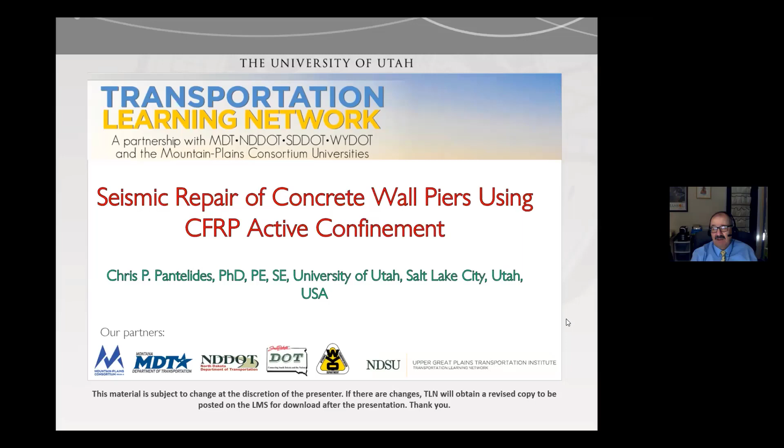Thanks, everybody, for attending. Before I start, I just want to start with this slide because I'm a professor and without my students, I can't do anything. Vanessa McEntee got her MS on this work from Boise, and Bhaskar Kunwar, who's originally from Nepal but now works here in West Jordan, Utah, were the students who did all the work.

So the topic here is seismic repair of concrete wall piers using carbon fiber reinforced polymer confinement. I'm sure all of you know what a concrete wall pier is, but I'll show you a few slides.

As an outline, I'll give a little overview of what a wall pier is, and I'll talk about the tests we did. We have an as-built concrete wall pier, built with standards before any seismic requirements, and a modern code compliant concrete wall pier that meets the current seismic requirements. Then we built a couple more specimens identical to the as-built one, but retrofitted. The first retrofit used vertical carbon fiber anchors, and the second retrofit used carbon fiber near surface mounted bars. So you would think we built four specimens and that would be the end of it.

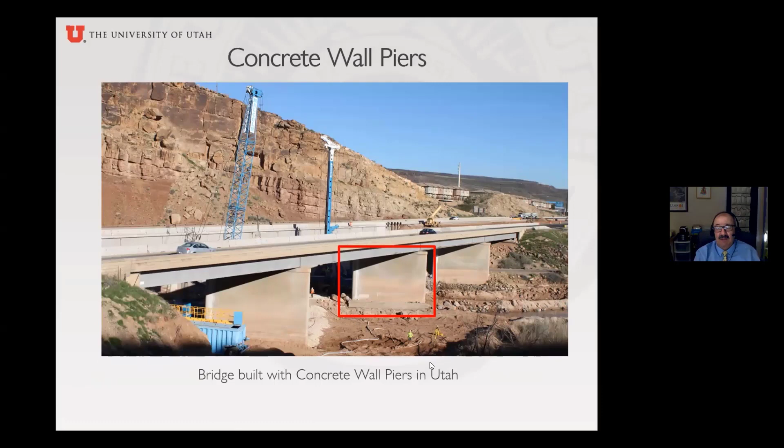Here is a bridge built with concrete wall piers in Utah. These are typically found in rivers, and I'm sure in most of your states you have something that looks like this. These were constructed before the AASHTO Bridge Design Code in the 1970s, mostly to support gravity loads. They are not designed for seismic loads, so we wouldn't expect them to do very well.

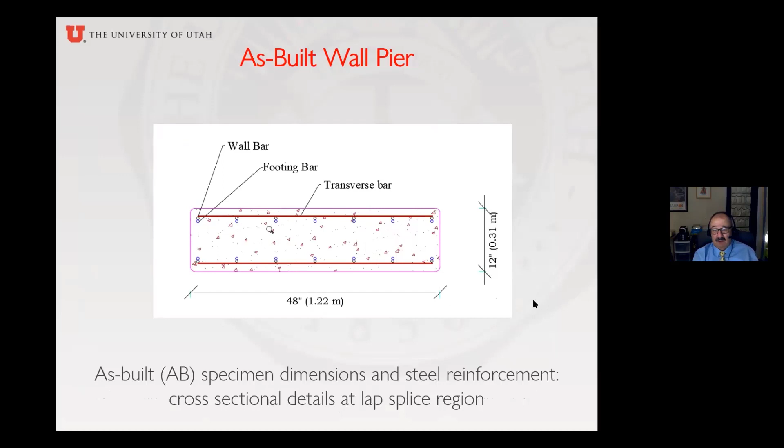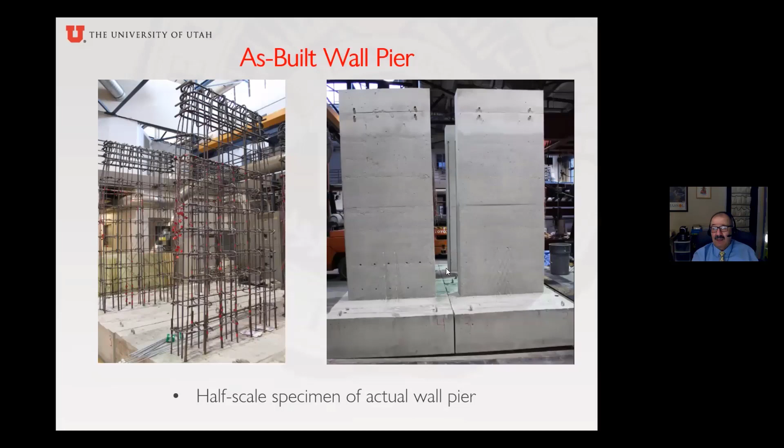So you can see it's an out of plane type of test. Here you can see we have the 4 specimens in our lab. The way we test this, we apply an axial load, about 6% of the capacity of the wall. That's typical. Then we apply a lateral load at increasing drift ratios, as you can see here with this actuator.

And that's how we keep track of how far the wall is moving in an earthquake. Here you can see it, for example, when it's moved about 5%. 5% of 8 feet is about 5 inches. So when it's pulled back 5 inches, you can see how it looks like. This axial load is applied with the rods reacting against the beam from a hydraulic actuator.

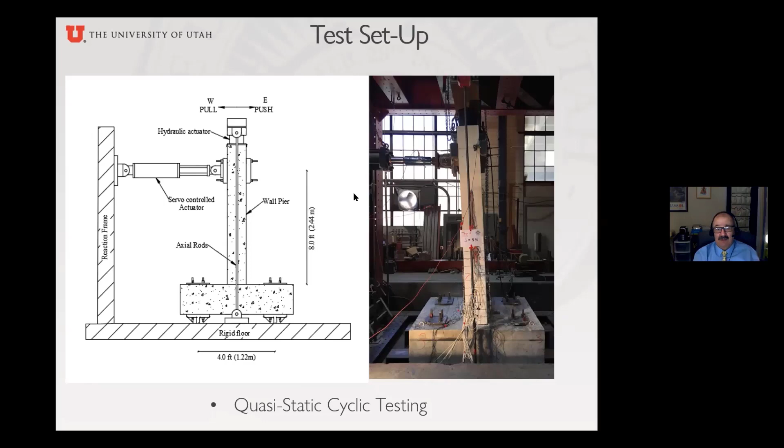So this is our cyclic loading. We apply 2 cycles at increasing drift ratios, anywhere from 0.5% to however far it can go. It's 2 cycles, and we found out 2 cycles is a good number, because if you do 3, you're fatiguing it too early. So you don't want to put too many cycles starting from the beginning, because as you can see, these cycles are getting pretty large.

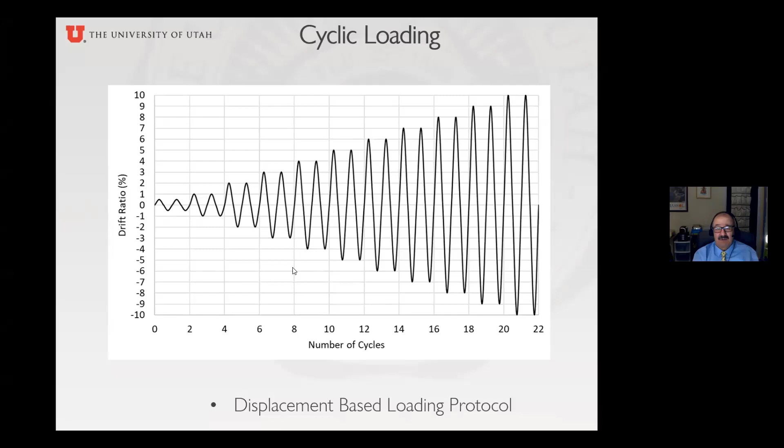The program that we use here is a little bit fancy. It's called OpenSees. It's open software for earthquake engineering. It's available, it's open source. You can go to UC Berkeley and you can download it. But then you need a little bit of time to learn how to use it.

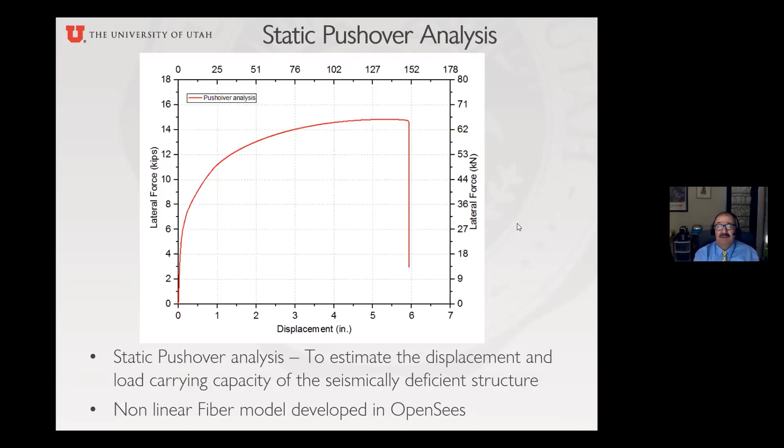So here's the first test. We failed the lap splices here at about 6% drift. And as we expected, the load was not very high. It was about 15 kip. Drift wasn't too bad, actually.

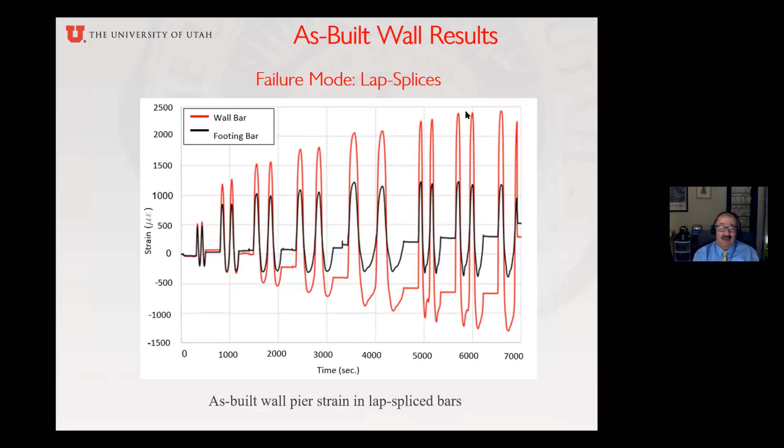It went a little bit further than what we thought, but it's definitely not performing, as I will show you, as well as the modern code detail wall. Here you can see why we know the lap splices fail, even though there's not a good picture. We see that the footing bar and the wall bar actually are very far apart. That means that the tension is not transferring the steel.

And here you can see that our prediction actually wasn't too bad. It's the red line, and the blue line is the test.

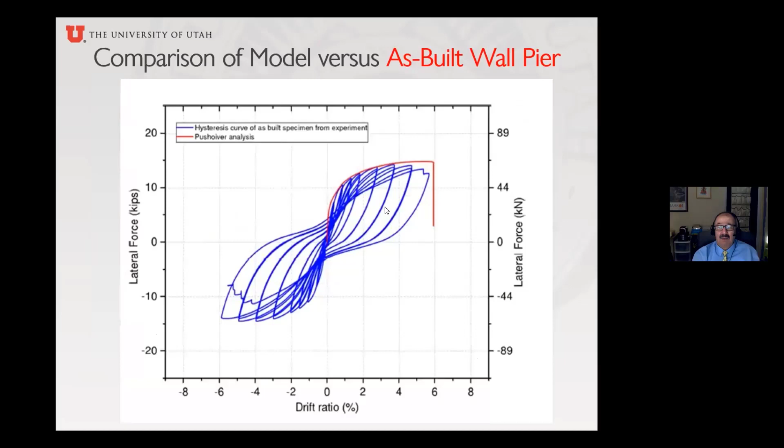Now, the modern code compliant concrete wall pier, how good is it? Or how bad is the existing wall piers? So for this one, we built it according to the AASHTO LRFD code. We made sure we didn't have any splices here at the bottom of the wall. All the dimensions were identical for the footing, for the wall, but the cross-section, as you can see in the reinforcement, is meeting the code, meaning we have more than 1% steel ratio.

We have good seismic hooks, you see, as the code requires now. The bars at the bottom hinge, where the plastic hinge is supposed to form, are at 4 inches spacing, which is very good, providing very good confinement. The bars also for flexure are number 6, so they're much bigger than the previous one. Everything is according to the code.

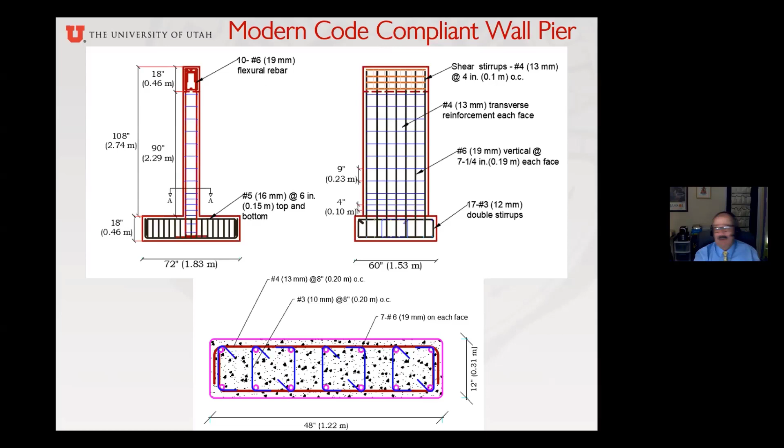So this one is a Cadillac compared to the previous one. So how well did this one do? You can see a picture of it here. You can definitely see here the confinement reinforcement, and you can see that these bars are definitely better detailed. There is no lap splice at all.

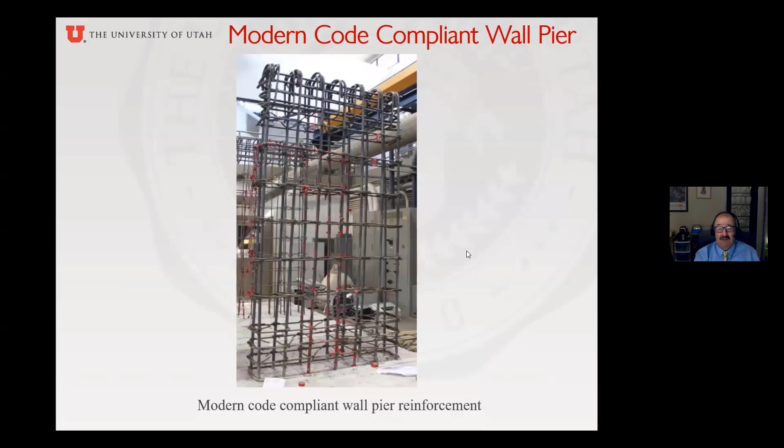So this one did very well. It went much further than the other one, but you can see it also sustained damage. And when you see the damage, you will say, hey, but this is damaged a lot.

Yeah, but this one went to 10% or more - actually a 10% drift ratio. The other one, remember, only went to 6%, and the other one went to 15 kips, while this one went to 30 kips. So it's day and night - almost double the performance.

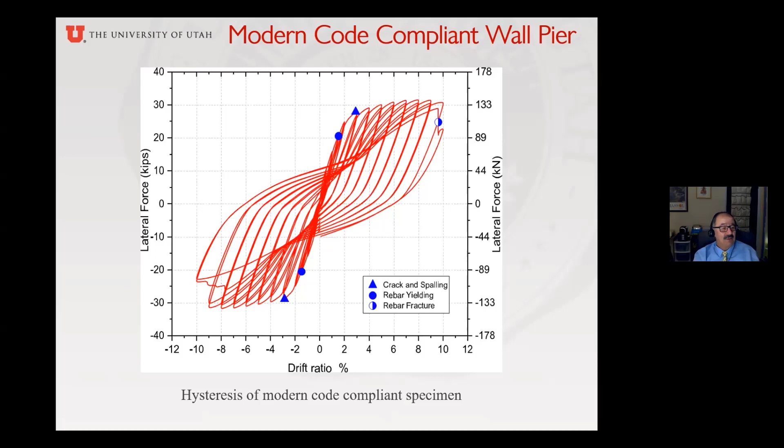You can see some of the original things that happen. At 2% drift, roughly 2 inches, the rebar started yielding. At about 3%, the concrete started cracking and spalling in this area that I showed you down here in the early days. Then at 10%, we actually had a rebar fracture - a couple of bars fractured on both sides of the wall. So this is much better performance than the as-built. We kind of knew it, but we needed this point as a reference to see how good your retrofit is, how close you're approaching this one.

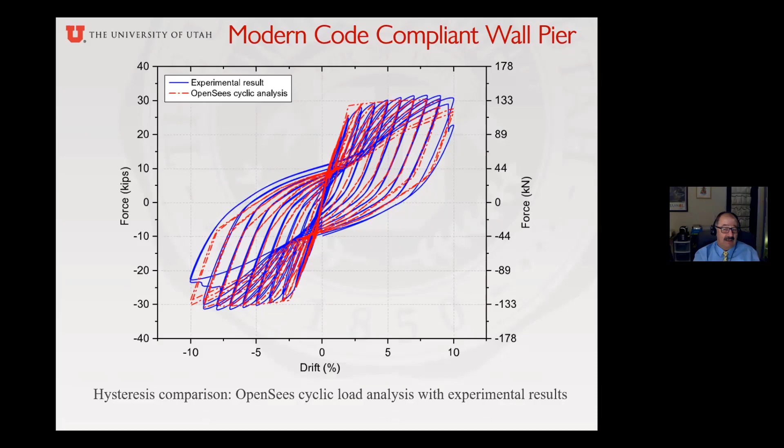In this one, my student got a little more ambitious and did all the analysis. You can see the analysis gives us a very good representation of the capacity of this pier - though I have to admit this analysis was done after we tested the specimen. But then he got a little better, and not only did he predict the static analysis, but he actually predicted the dynamic analysis. So this is cyclic, but if we want to throw this into a potential earthquake, we can actually do this now, and it will predict pretty accurately how well the wall pier will do in a real earthquake if we throw the ground acceleration at it.

Retrofit methods - the question now is, how do we fix the deficiencies of the as-built wall pier before an earthquake happens? In this project, we had some co-sponsors who were supplying materials, and they said, why don't you use carbon fiber reinforced polymers? Everything else has been used, why don't you try something new? And we said, yes, let's try that - how good would these carbon fiber reinforced polymers work?

Now, a little side story here. I started working with carbon fiber reinforced polymers in the 90s. The Utah Department of Transportation found that a lot of the bridges on Interstate 80 had corrosion, and they wanted to postpone replacement of these bridges - they were trying to buy time. So we used carbon fiber composites to wrap the columns, joints and beams so they could buy time and replace those bridges in a more regular way, rather than trying to replace 15 bridges at once. That's how I got introduced into carbon fiber reinforced polymers about 30 years ago.

At that time, we were doing it just for prolonging the life of the bridge. But later on, we did some tests with the I-15 reconstruction where we tested a bridge for seismic performance. We said, wait a minute, these carbon fiber polymers could be used to improve seismic performance. At that time, UCSD in San Diego had done some tests on columns, and we followed their research and built on that - we did some beam column joints at the cap beams, and those proved pretty good.

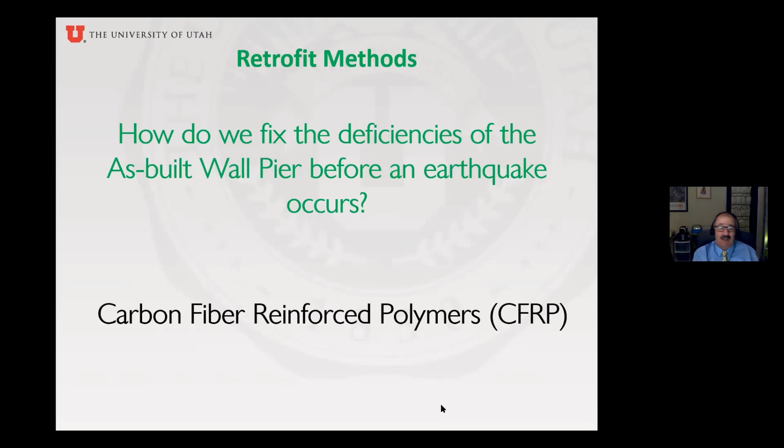Just a little introduction for those of you who are not familiar: carbon fiber reinforced polymer is lightweight, corrosion free, and has a higher tensile strength than steel. It can be molded to any shape, but it does have a lower modulus of elasticity than steel.

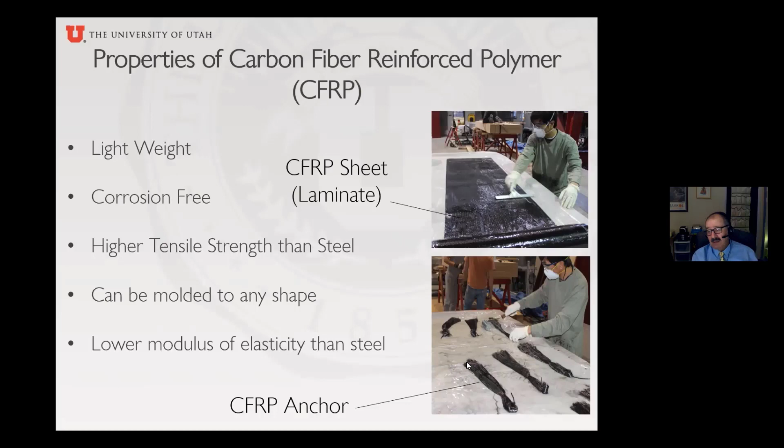In this work, we actually used quite a few different types of materials. We used a carbon fiber sheet, as you can see here, which is a laminate. Then we used carbon fiber anchors in a couple of ways, as I will show later. It looks like a braided thing, and that's what it is, but it's very strong - tensile strength 165 ksi, tensile modulus 15,000 ksi. But of course, the downside is tensile elongation is only 1.1%. The anchors we used were 3/4 inch diameter.

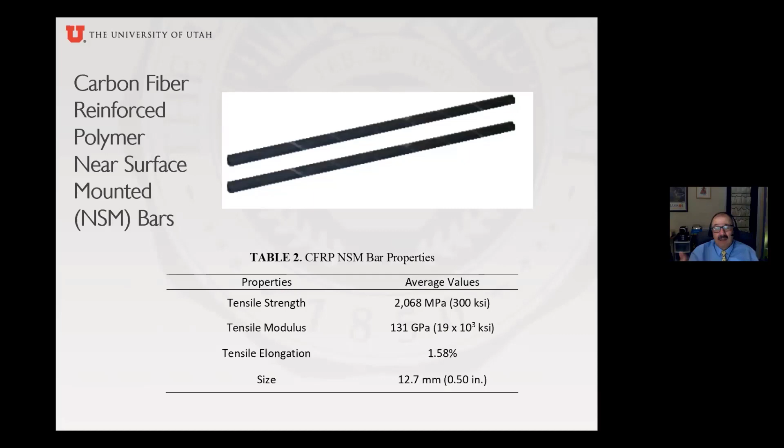We also used, for our second retrofit, carbon fiber reinforced polymer near surface mounted bars. These look like fiberglass rebar, but they're actually carbon fiber. They have high tensile strength, 300 ksi - that's almost 5 times stronger than steel. Tensile modulus, though, is a little lower than steel at 19,000 versus steel's 29,000. Tensile elongation is the biggest problem, 1.6% - for example, a steel bar can go up to 10%. So it's a little bit low for strain. These carbon fiber bars were about 1/2 inch diameter.

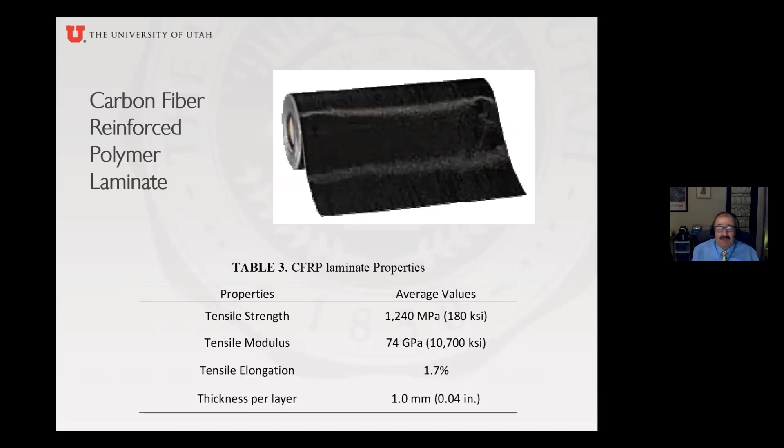And the carbon fiber reinforced polymer laminates, this is the sheets. Tensile strength is still good. It's unidirectional fiber in this direction, you see my cursor going up and down. It has very high tensile strength, 180 ksi. Tensile modulus is pretty low, 10,700. But the biggest problem is tensile elongation, 1.7%. And the thickness is very thin, 0.04 inches. But it does very well in confinement.

So let's start with the third test, which is the wall pier that we retrofitted with carbon fiber vertical anchors. To clarify, retrofit means we did this before we subjected the specimen to an earthquake or simulated earthquake.

So here you can see the retrofit. The original cross-section is the same, but in order to overcome the lap splice issues, we use vertical anchors. These are about 9, 3/4 inches in diameter. There are some challenges trying to drill into the footing here. Yeah, those are challenging to drill, but they're mainly there to take the tension in the lap splice.

The other thing we did before we put these anchors, we put vertical sheets to take tension in this direction, because as I told you, the steel in this direction had a very small reinforcement ratio. And we also found that if you sandwich these anchors with 2 layers of sheets, they actually perform very well.

In addition, to improve the shear friction capacity of the lap splice, we use horizontal anchors through the 12-inch thickness. You can see it here, 2 layers. Each layer, that we call these transverse anchors. Each layer has 5 anchors. These anchors are 3/4 inch diameter again, and they are splayed 360 degrees.

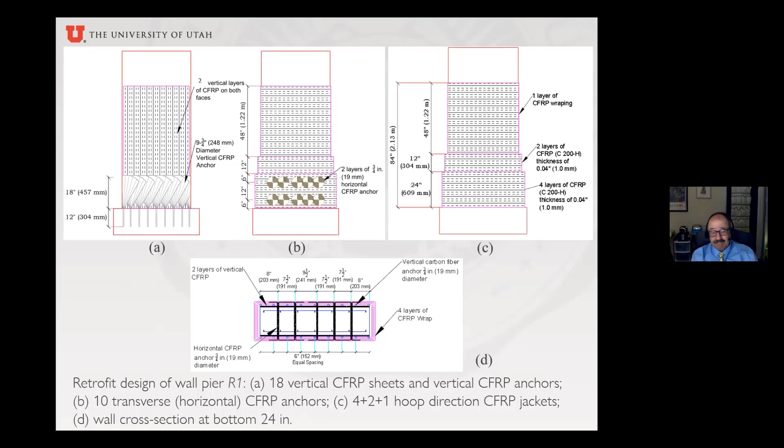Below the anchors and above the anchors, there is also carbon fiber sheets in the hoop direction, meaning going all the way around the wall. So there are quite a few layers of those. There are 4 layers for the first 2 feet, 2 layers for the 1 foot above, and then the other 4 feet is just 1 layer. So there's quite a few layers here, but the bottom 2 feet is reinforced pretty heavily.

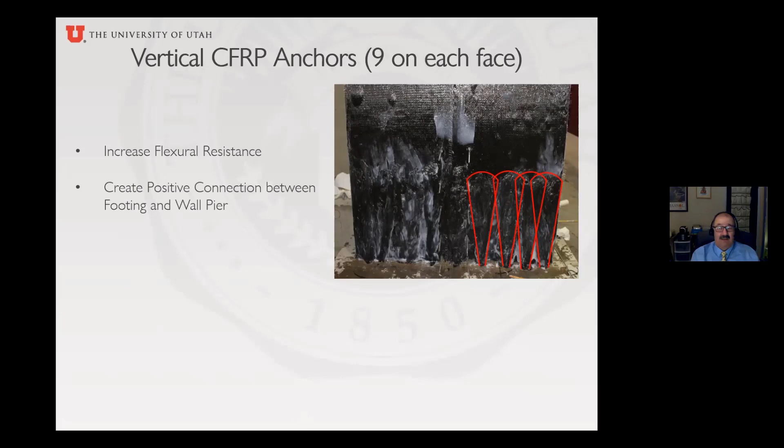So here you can see the anchors that are sticking up about 18 inches, and they overlap each other. There were 9 of these on each side of the wall. So the idea here is to increase the flexural resistance by creating a positive connection between the footing and the wall, almost completely ignoring the steel that was there, which wasn't much, as we saw in the first test, because it was a lap splice failure.

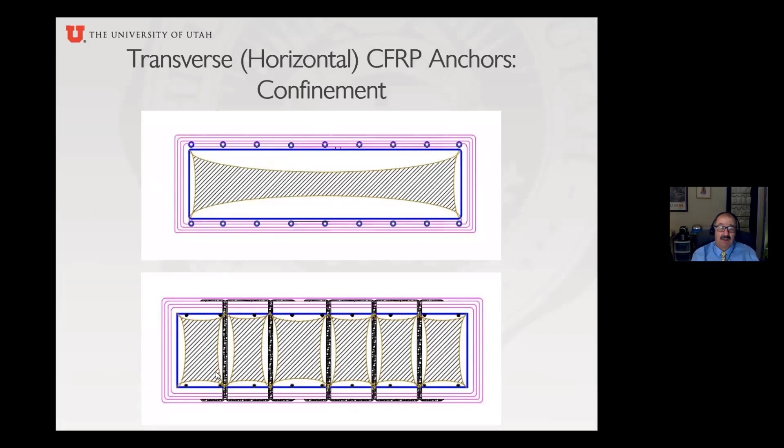So we found out in previous work that if you sandwich the anchors, it makes them very strong and very hard to fail. These anchors help with confinement as well, because this is a very long wall, 4 feet long, and they increase the clamping pressure on the lap splice bars, and they also increase the confinement. The confinement is easy to see: if you have a 4 foot by 1 foot wall and you go around it, your confining area is what you see shaded. But if you put these transverse anchors, now you're cutting that area into 6 pieces, so it's much more manageable and much easier to confine the wall in the transverse direction this way.

In addition, the anchors serve the dual purpose of putting confining pressure into the lap splice bars. And every time you have pressure here, when you put tension on these bars, it's much harder to pull them apart, because of the shear friction that you're creating with this transverse pressure.

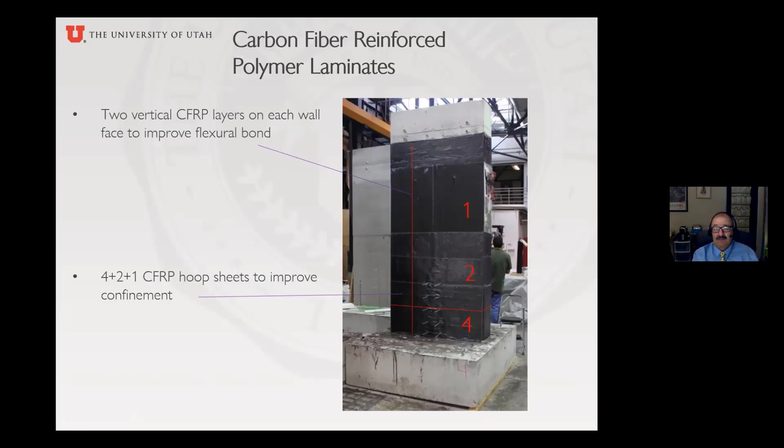So these are the vertical anchors. There are 9 of them on each side, and 2 sheets, 1 on each side. There are 10 anchors, 2 rows of 5, and then 4, 2, and 1 hoop direction carbon fiber sheets. So this is the specimen for the retrofit one.

So what happened? This is what happened if we compare it to the first test. You see we improved the lateral force from 15 kips up to about 25. We improved a little bit the displacement capacity, but not much.

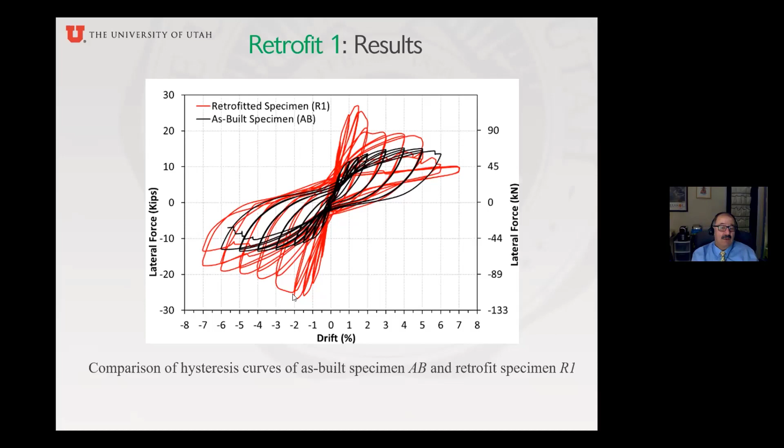Unfortunately, this drop is because one of the anchors actually pulled out from the hole where it was. This was a little bit of a construction error on our part. The epoxy that was supposed to hold it in was not placed correctly. So it pulled out, and in that case it failed on one side of the wall. The other side of the wall, nothing failed. So it's really very good.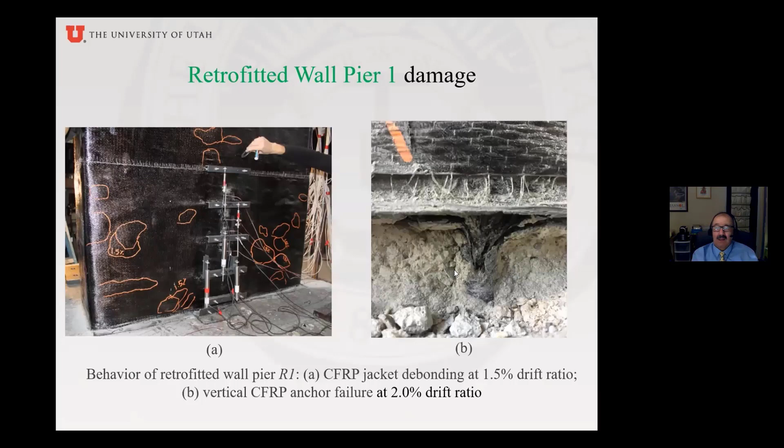But here is the main failure, which, as you saw, the anchor failed at about 2% drift ratio. One of the anchors actually failed. The lap splice actually wasn't too bad, because as you can see here, the footing bar and the wall bar, first of all, the strain is very small. They never yielded. So it's almost like the steel wasn't there. It didn't matter if it was there or not.

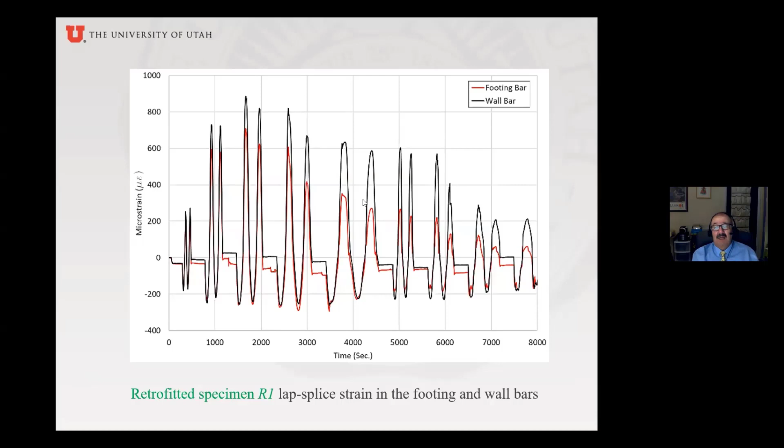So I would say that the retrofit was successful. And the second one was a retrofit using the near surface carbon fiber bars.

And here you can see these bars. They're 1/2 inch, as I said. We drilled again into the footing and they go all the way up. And the way we drill this is we drill it into the concrete. I'm going to show you a cross section in a minute.

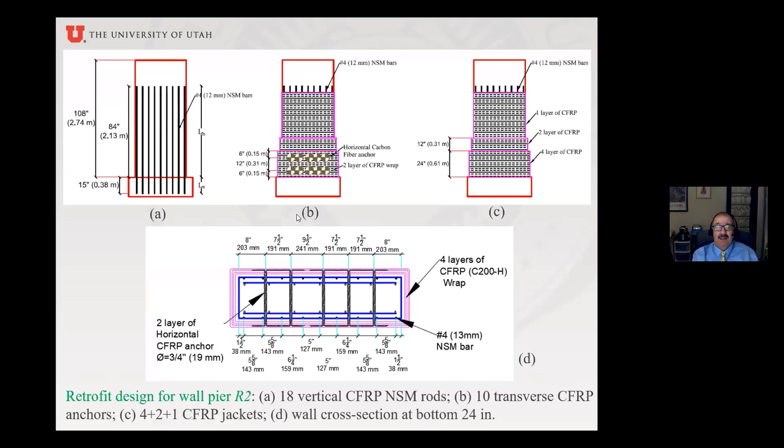Other than that, we had a similar situation, 10 horizontal carbon fiber anchors, 3/4 inches. We didn't have any vertical sheets because these carbon fiber anchors are very good in tension. And we had only the hoop layers, 4, 2, and 1, like I showed you before. So in this case, instead of 18 carbon fiber anchors, we had 18 vertical rods. Everything else is pretty much the same.

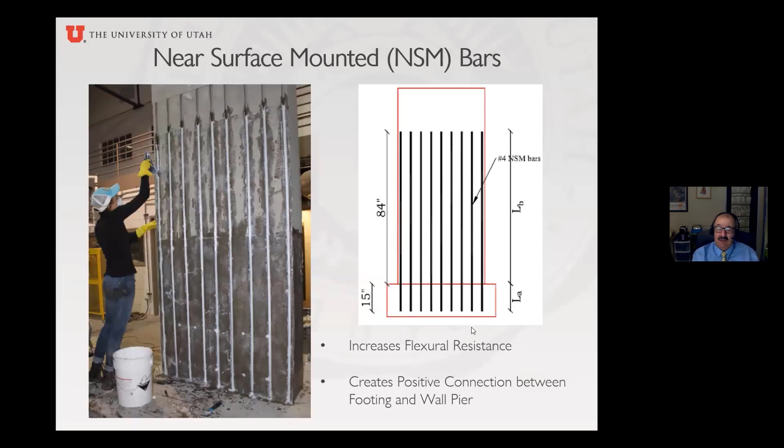Here you can see Vanessa applying the resin for those anchors. And the hard part, of course, is to drill into the footing. That's pretty difficult, but it's difficult even with the other anchors, the splayed anchors. So it will give you a little bit of trouble trying to put it into the footing. But it does increase the flexural resistance and will create a positive connection between the footing and the wall pier.

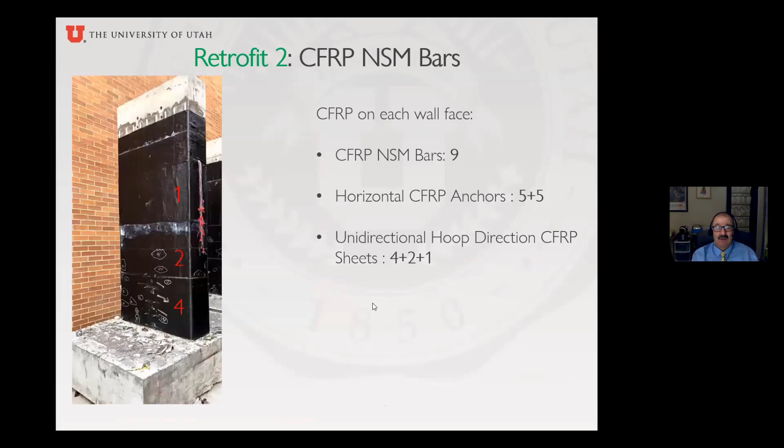Here again you see the anchors, the transverse anchors that we talked about. And here you see the 4-2-1 layers for confinement.

So here is the result. You can see that this specimen again went almost to 25 kips, but unfortunately this one again failed at around 2%. We had one of those near surface mounted rods pull out of the hole because the resin that we put in there was not packed correctly. On the other hand, the other side of the wall did just fine, because in that case the anchors were actually packed correctly, and you can see we achieved our goal.

And here we saw it in the video. You can see here that the resin pulled out from the concrete. It didn't bond very well to the concrete in the hole, and we got these dust clouds that came out. You can tell it's because we didn't break the rod. The rod is very hard to break, but the rod did pull out from the hole because the resin in the hole was not packed properly.

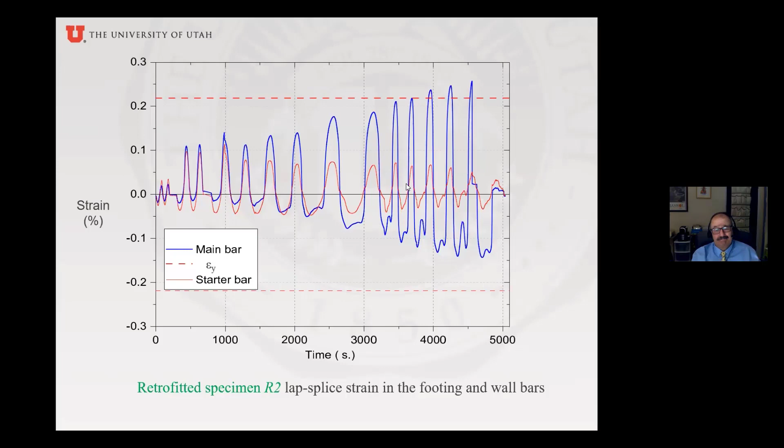And again, here you can see that the lap splice did very well actually in this case. It's almost like it didn't matter.

So as a summary, for the as-built, the load was 15 kips. Both retrofits achieved 26 kips. The drift ratio for the as-built was 6%. The one with the anchors went to 7%, a little better. The near surface one was 6%.

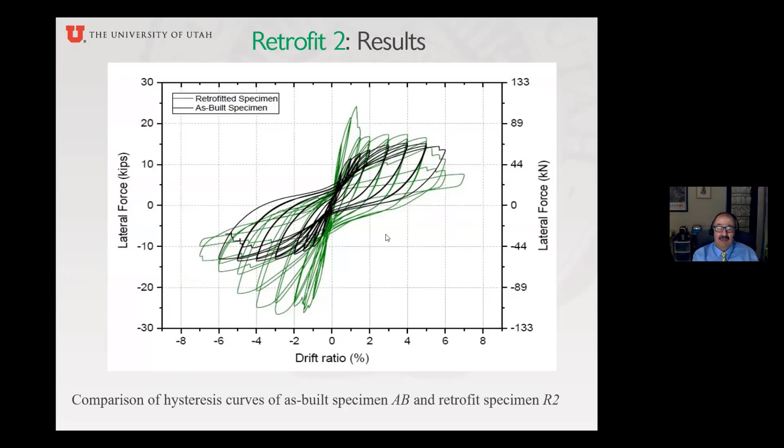But what is important here, perhaps more than anything, is the energy dissipation. The energy is the area of these curves, because this is force, this is displacement pretty much, and you can find the area. That's the energy the specimen would dissipate in an earthquake. You can see that the as-built only dissipates about 500 kip inches, whereas both retrofits were above 800. So this tells you that the retrofit actually makes the wall much more resilient when you have an actual earthquake, and it actually worked. The failure mode was not lap splice.

Here we had the anchor fail, and here we had a bond failure of the NSM bar.

Now let's look at repair. So we had the original specimen, the as-built. How will it perform after an earthquake occurs? If we have it, there is an earthquake, and you didn't retrofit it, can you fix it? Can you repair it now after the earthquake so you can keep the bridge open?

The same question applies for the modern code wall pier. It's a modern code, you had an earthquake, you designed it according to the code. Can you fix it now that it's been damaged due to an earthquake?

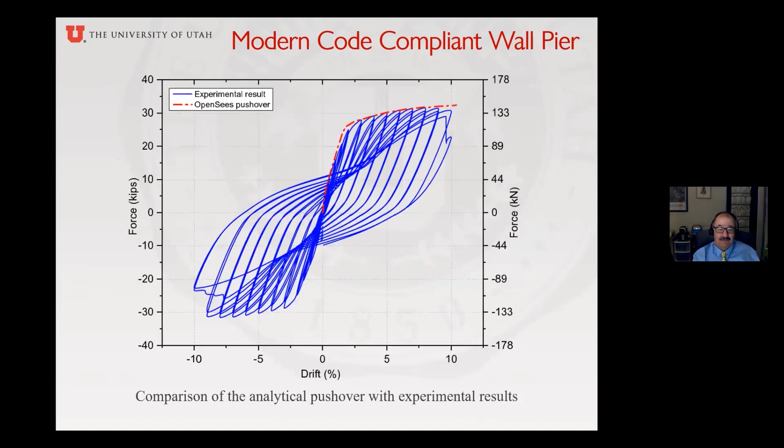And I have to say, the damage due to an earthquake, as you can see here, is very severe. When I show you this wall, for the modern one, we had a bar break here, and we had a lot of concrete spalled. Can you repair this? That's the question we're asking.

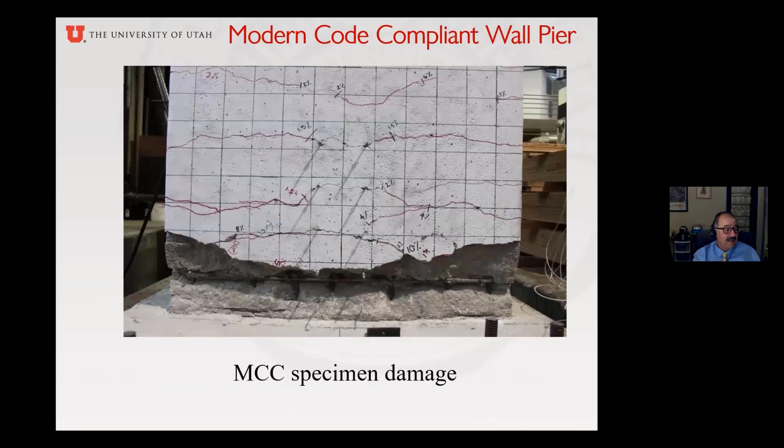That's a pretty tough question. Let's see how we did.

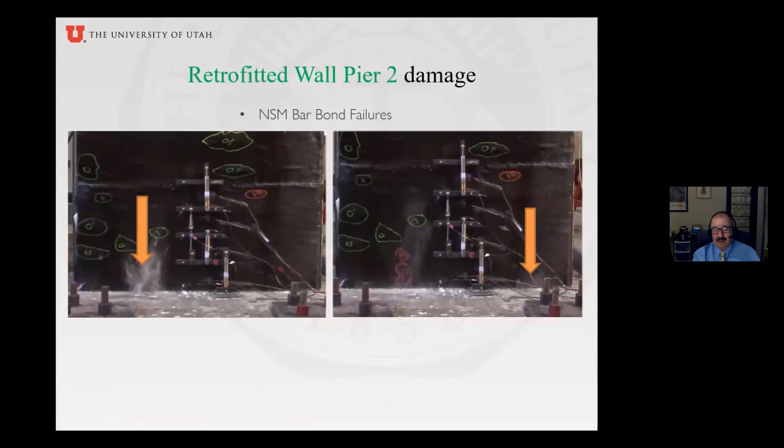So first, we will start with the as-built, the one that was deficient. We tested it and we failed the lap splice. And we learned something: if you use carbon fiber rods as vertical near surface mounted bars, they're great, they're very strong, but they are not very ductile.

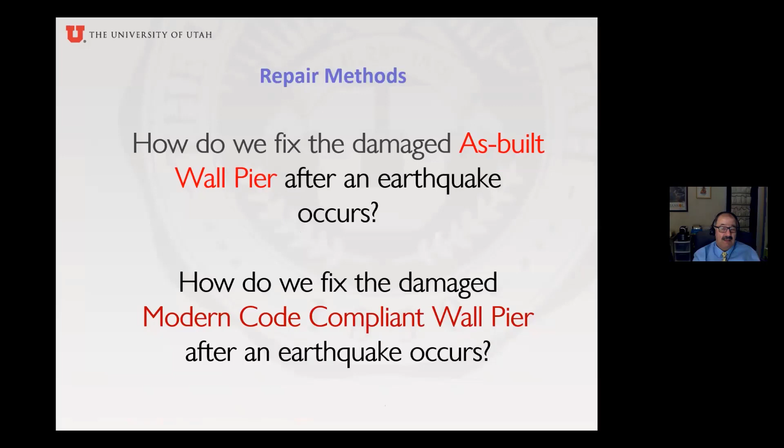So we decided to use mild steel vertical near surface mounted bars instead of carbon fiber. The situation is very similar to the second retrofit, but instead of carbon fiber, you use just mild steel grade 60 bars, number 4 bar, off the lot. We had 9 on each side like before. We still used the carbon fiber transverse anchors, the 3/4 inches, and then did our 4-2-1 confinement, the same story I described earlier in the hoop direction, going all around the wall.

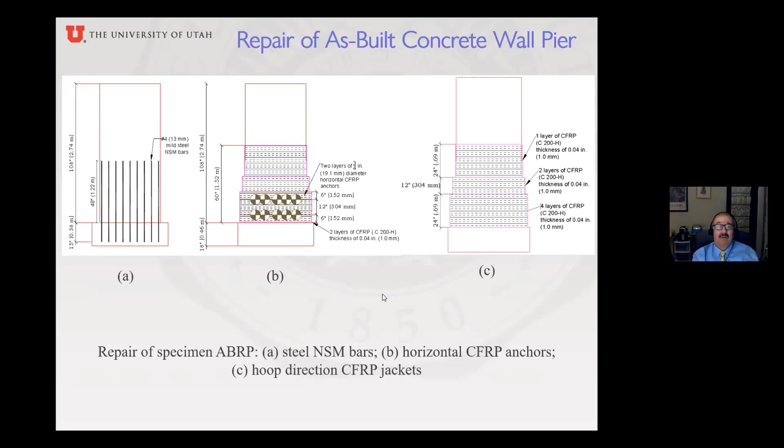So you see here Vanessa, she's epoxying in. Drilling in to put near surface mounted bars is not that easy - drilling into the footing is a hard story. But we learned our lesson and tried to do this very professionally. We got a Hilti epoxy and put it in, and this time you can see these anchors are very good.

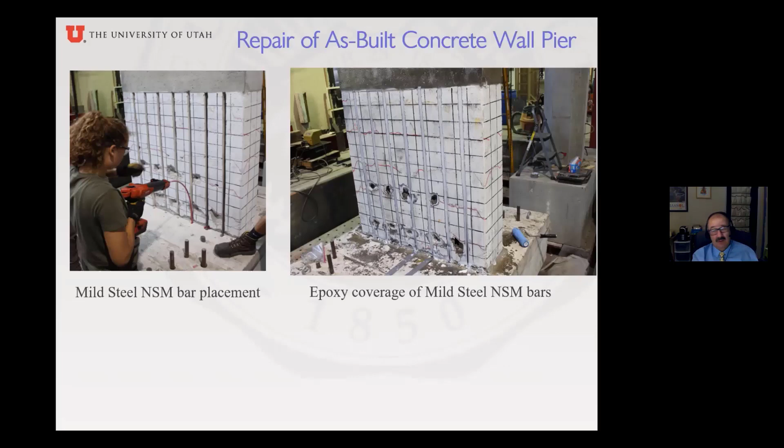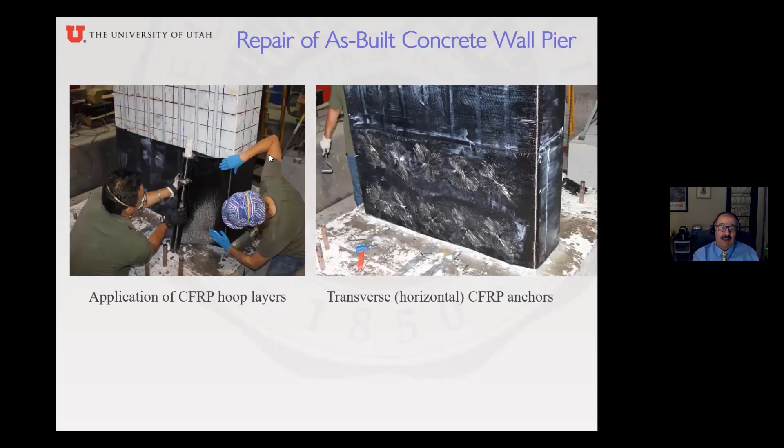Also here you see the holes - we had to drill holes to put the transverse anchors, and those were carbon fiber. You can kind of see them over here, they look a little blotchy, but those are the 5 anchors, first row, 5 anchors, second row. And then you see Bhaskar here also applying the carbon fiber sheets for confinement.

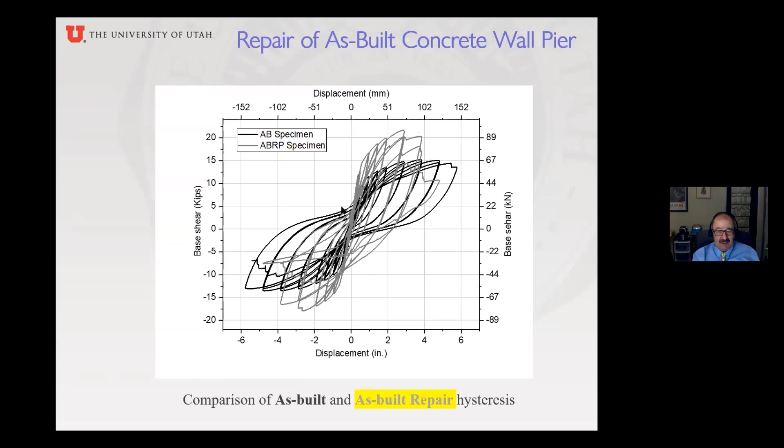But just remember, this is a repair - almost like a rebirth of the wall pier, because this was damaged and now we're actually repairing it. If we compare the numbers, we went from 15 kips for the as-built to 22 for the repair. The drift ratio at the peak was 4%, we went down a little bit to 3%. Ultimate was 6, we went down to 5.

The failure mode of the original was the lap splice failure, and as far as the repair, we debonded the mild steel bars. Yield force was roughly the same. Stiffness was much stiffer for the repair one. Yield displacement about the same. Ultimate displacement a little bit less for the repair.

And the ductility, which is the ratio of the ultimate to the yield, was 7 here and was 6.5 for the repair. But to give you an idea, 6.5 is not bad - for example, Caltrans doesn't want you to design something with more than 5. So 6.5 is good.

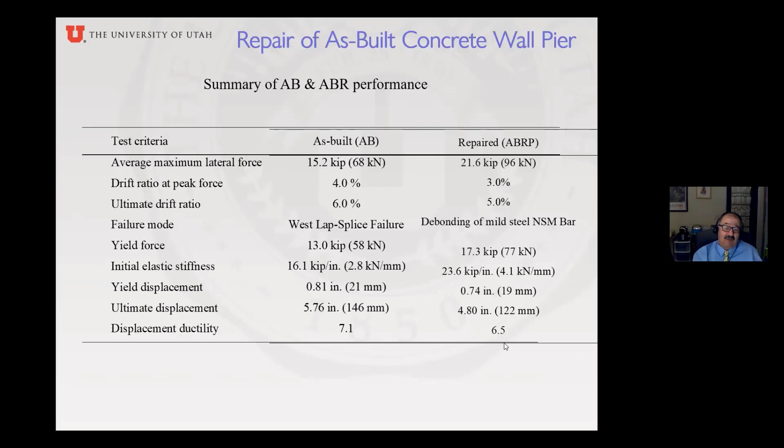And then the last test I'm going to show you is the repair of the modern code compliant wall pier. This is the one that was really damaged. And here we use the method we actually developed in a previous project.

And this was also funded by MPC, something we call the donut. So the donut, we did it there for columns, but we tried to replicate it here for wall piers. So what it is, you forget about everything inside the wall, all the vertical steel, and you try to replace it with headed steel bars outside the concrete of the wall. And then you make a carbon fiber shell and you fill it with concrete grout. It's as simple as that.

What you're doing is all the damage area in the plastic hinge on the bottom, you try actually to fill it with concrete and vertical steel bars that will transfer the tension to the wall that's not damaged, and you're moving the plastic hinge right above the donut.

So I'm going to show you, and then you will realize this is a donut, but it's an elliptical donut and not a circular donut. Because remember, our wall is 4 feet by 1 foot in cross section. So here it's actually drilling is easy because you drill away from the wall and you put in the headed steel bars. These are grade 60, very easy to install.

Drill the hole, put a little resin first, then push it in until you see the resin come out. Then you know that this was done properly.

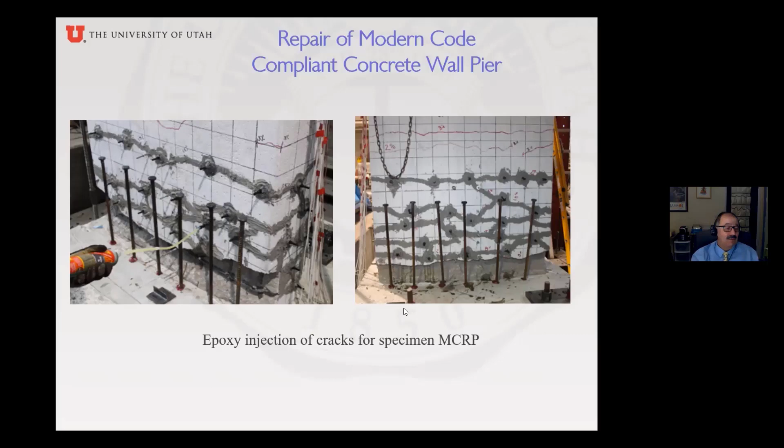Sometimes the grout doesn't bond very well to the original wall concrete, so we build this steel jacket or steel collar and we put some studs on it. So the concrete grout that goes in here will actually bond to the concrete. So for example, the wall had a compressive strength of 5,000 psi, and the grout ended up being close to that, about 4,500 psi. So sometimes they won't bond automatically.

So if you do this collar, it's not that difficult. In fact, this steel collar can be built very easily for those who know how to weld by just welding and letting the weld cool down. When the weld cools down, of course, the steel tends to shrink and it clamps onto the concrete. So there's nothing to it.

There's nothing else holding up this steel collar. These studs poking out here, they will grab onto the new grout that you pour inside the shell.

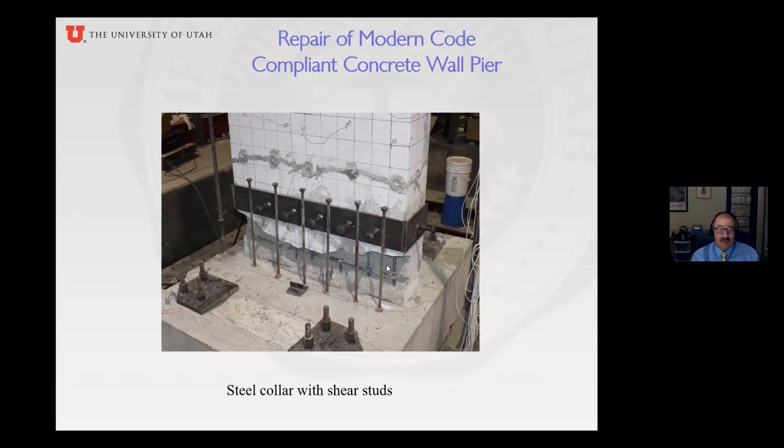So how do you make the shell? Well, we use an aluminum foil and some wood form, and we made this big circular or elliptical tub, as we call it, the tub, instead of a donut in this case. And that makes the form work.

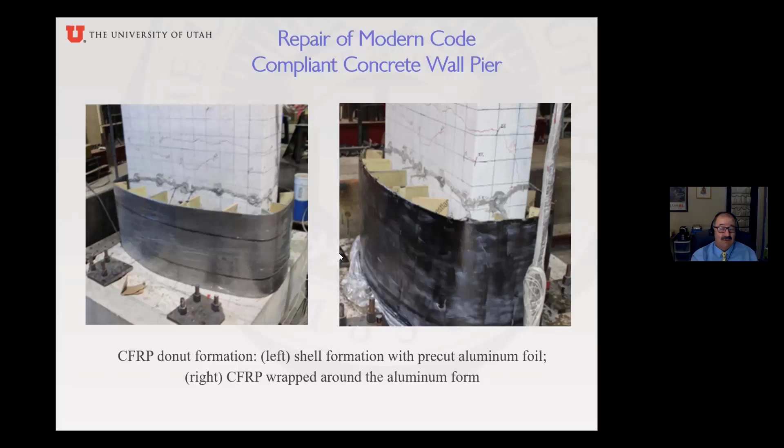And then you wrap this aluminum foil with the carbon fiber sheets, and then you can take out the wood and the aluminum foil. In about 3 or 4 days, this carbon fiber actually hardens. It hardens very hard, it's almost like glass. You have to be very careful, you can cut your fingers.

So this is what it looks like in cross section. This is the original 1 by 4 feet wall. And you see we ended up with a 30-inch by 60-inch tub here. We have 9 hoop layers of carbon fiber.

And we found in previous tests that we did, actually again under the Mountain-Plains Consortium, if you put a vertical sheet, that helps you consolidate the stresses that this carbon fiber is going to see, because sometimes you have a little bit of a vertical action. So it's good to put at least 1 vertical layer on the outside.

And here you can see number 5 headed steel bars. There's 5 on this side, actually 6 on this side and 6 on that side. The area of this kind of is equal to the area of the original steel inside.

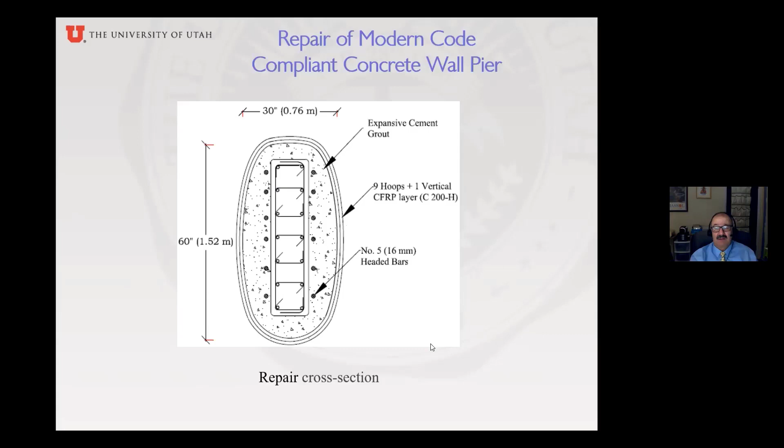So you have to be careful when you do this, because the original moment demand was down here. But now that you put this donut, your demand, of course, increases. So you have to be careful when you do retrofits like this to protect the wall so you don't exceed the capacity.

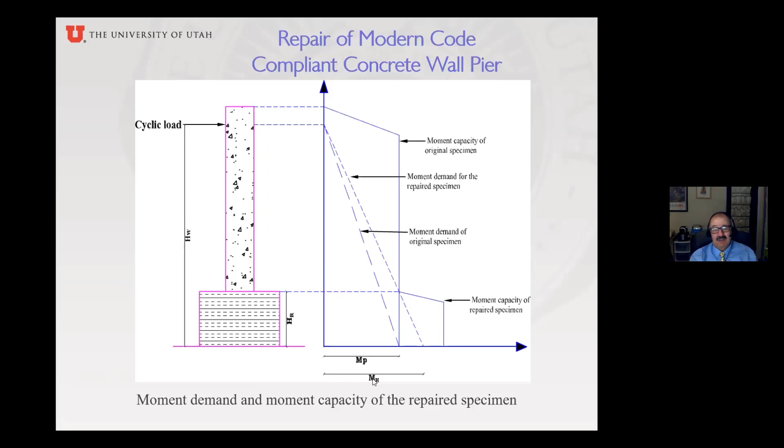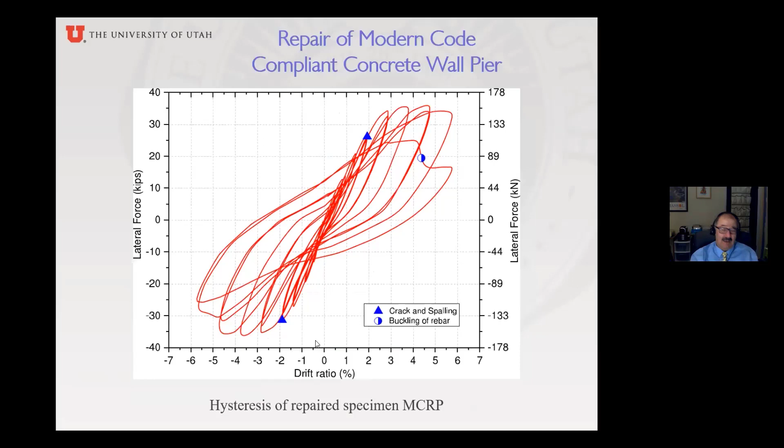And you can see, as we predicted, we failed the wall above the donut. Nothing failed inside the donut, everything was above the donut. You can see it here at 5%, and you can see it here at 6%. And we could have gone even at higher drifts if we wanted to.

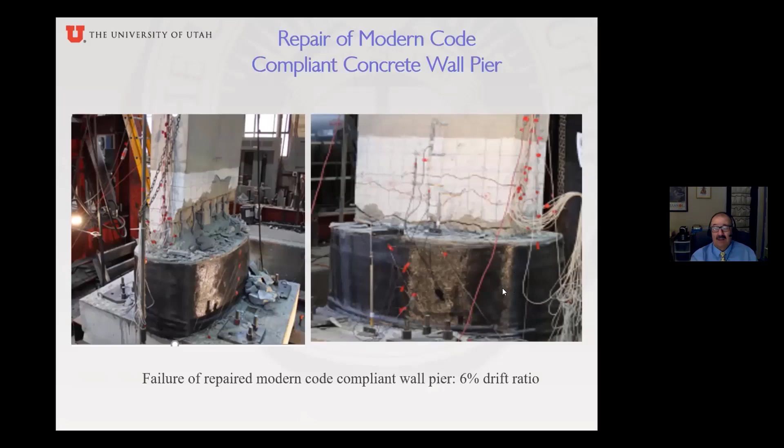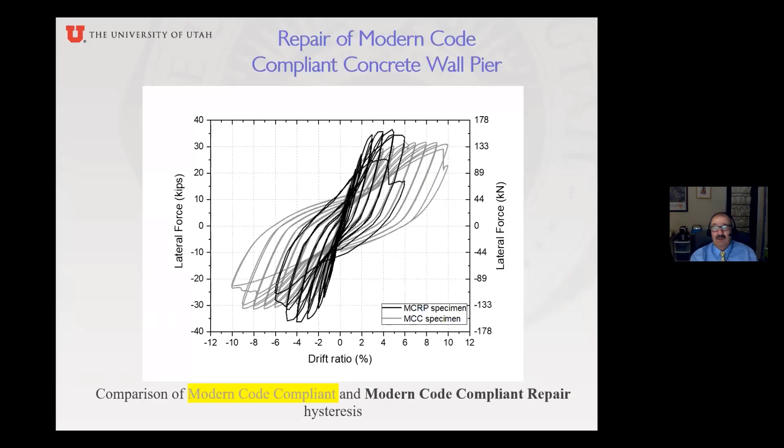All we had to do was put carbon fiber layers on this wall, but we didn't want to go above 6%. That was plenty enough for us. You can see that we increased the strength a little bit, from 30 kips to 35 kips. Performance is pretty good up to 6%. So the repair, I would say, is very successful.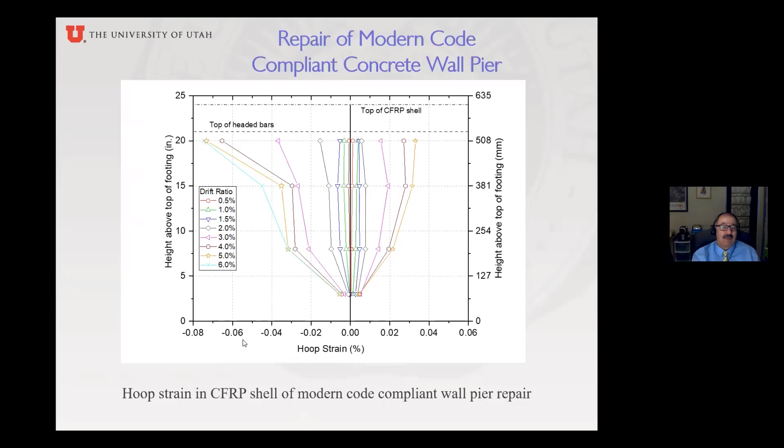So as a comparison, what was the modern code compliant? It was 31 kips, say 32. The repair was 36. The drift at the peak was 8, here we got to 5. The ultimate was 10, here we got to 6. The failure mode in the original was west bar fracture. Here we saw a little buckling of the wall bars above the plastic hinge.

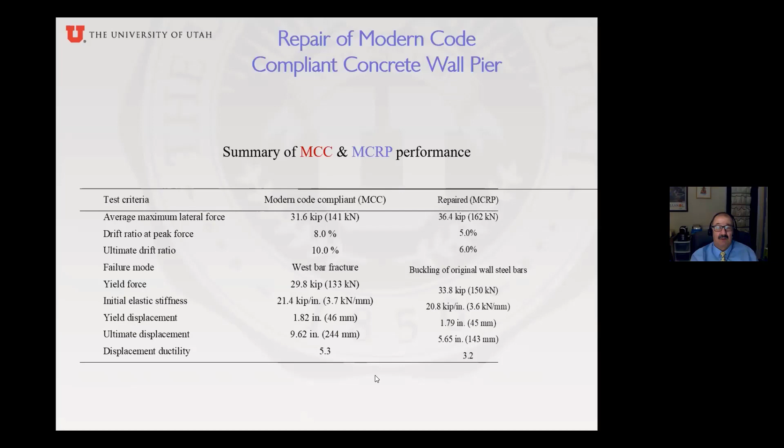Yield force was 30, here was 34. Stiffness was 21, here less, 20.8. Yield displacement about the same, 1.8 inches. Ultimate displacement was 9.6 there, 5.6 here. Ductility 5.3 there, 3.2 here. So I would say this was a good repair.

I'll summarize the conclusions, because there are 6 tests here, divided into retrofit and repair. I'll summarize in 2 groups. Let's talk first about the retrofit.

The as-built wall specimen was not able to develop the theoretical capacity because the lap splice failed. The first retrofit, R1, with vertical anchors, transverse anchors, vertical sheets, and hoop carbon fiber sheets, dropped after the first cycle at 2% drift because two of the vertical anchors fractured on the west side of the wall. On the east side, where the anchors didn't fracture, it behaved very well.

Actually, this retrofit performed better than the as-built and reached a drift of about 7%. At the 2% drift ratio, where we see the first drop, it had 2 times the initial stiffness, 1.6 times the energy dissipation, and 2 times the flexural capacity of the as-built.

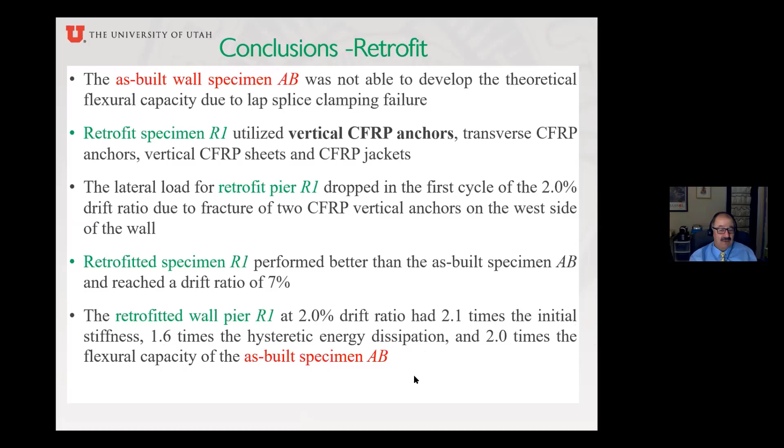How about the second retrofit, the one with the vertical near surface mounted carbon fiber bars? It also had the transverse anchors and the carbon fiber jackets. This one was good up to 1.5% drift ratio on one side, where 2 of the near surface mounted carbon fiber bars debonded. Of course, this can be prevented if you have a very professional crew installing these bars.

But on the other hand, it behaved well and resisted the increased lateral force where the near surface mounted bars didn't fail. The jackets and the anchors were intact and did not experience any crack until 7%. So retrofit R2 had about 2 times the initial stiffness, 1.7 times the energy, and 1.6 times the flexural capacity. I would say these two retrofits were very equivalent, and probably these near surface mounted bars, if installed properly, would have done very well.

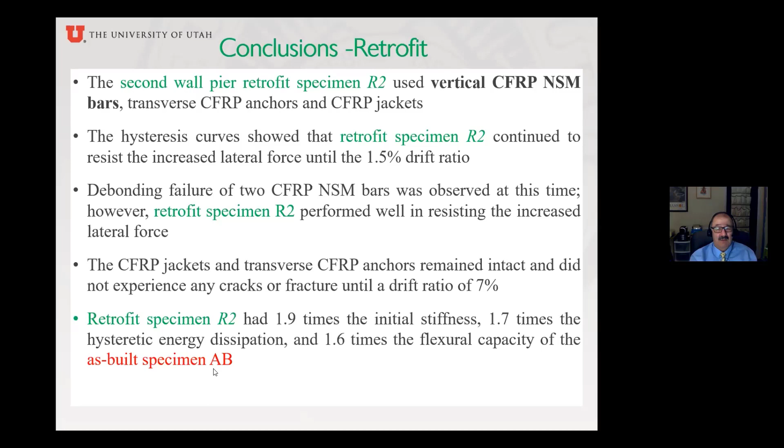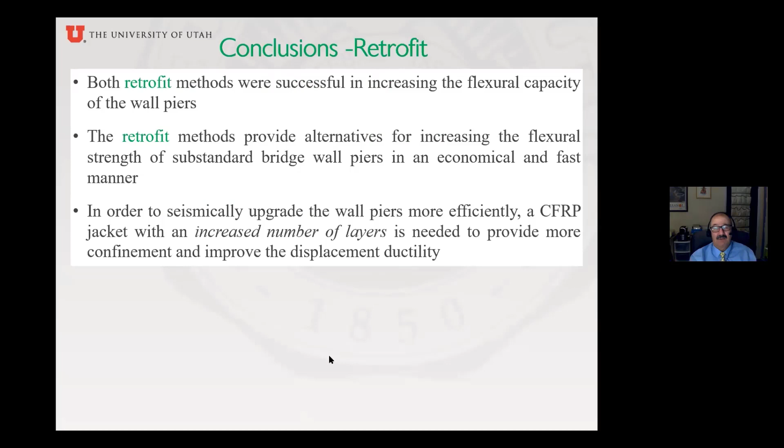But I would say they were successful. They give you some alternatives for increasing the flexural strength in an economical and very fast manner. Remember, I'm working with 2 students in the lab and we're doing all this ourselves. So I think to make it more efficient, probably the jacket needs an increased number of layers to provide more confinement and improve the ductility a little bit more.

How about the repair? First, the modern code compliant specimen was able to fully develop its theoretical flexural capacity, which is good news for the existing codes, and performed very well up to a drift ratio of 10%. The deficient one and this modern code specimen were repaired after significant damage. Especially the modern code specimen had a lot of damage; we broke the bars. But even the as-built deficient one had damage because of the lap splice failure.

The repair of the as-built one failed in the cycle at 4% drift ratio because of debonding of the mild steel near surface mounted bars. I still think the mild steel near surface mounted bars are better than the carbon fiber because they actually give you a little bit more resistance before they break. So the repair of the as-built specimen performed better than the as-built specimen itself, even though it was repaired, with increased stiffness, lateral force, and hysteretic energy.

How about the repair of the modern code specimen? For the repair of the modern code, we used a very rapid seismic repair method.

We use what we call a plastic hinge relocation with that carbon fiber shell and the headed steel bars. This repair was applied successfully and restored both the load carrying capacity and the stiffness of the damaged reinforced concrete wall pier with a cross-section aspect ratio of 4. So the repair method was able to strengthen the damaged region considering the additional bending moment and shear.

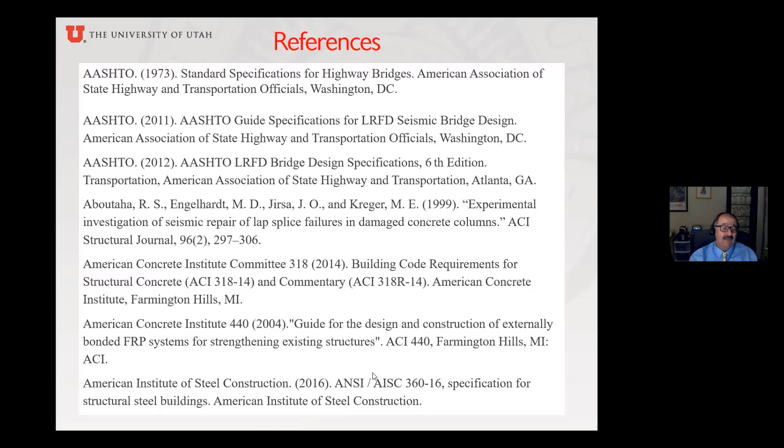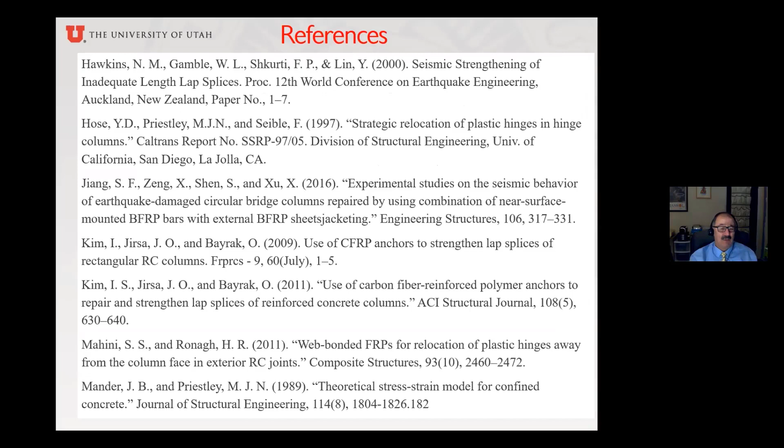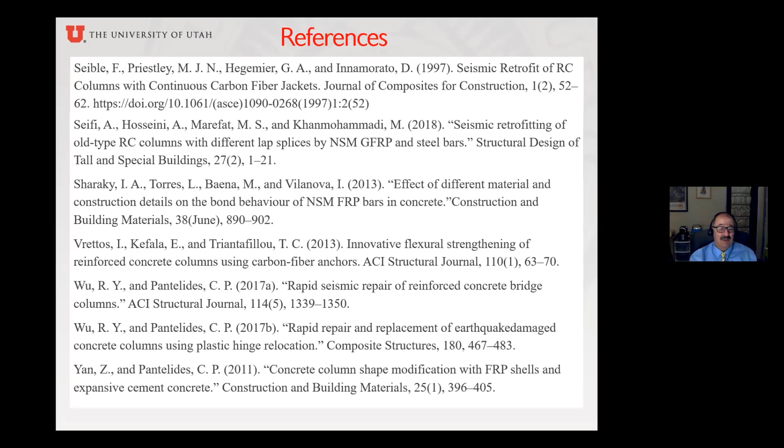So with that, I have here the references of everything that I talked about in this paper. These are works that have been done before, none to the level that we did though with our scale specimens. These were half scale, so they're kind of large and almost very real. And so you can see all these problems that can arise. And I want to thank you for your attention. And if you have questions, I'll be happy to answer them. I think we have about 15 minutes.

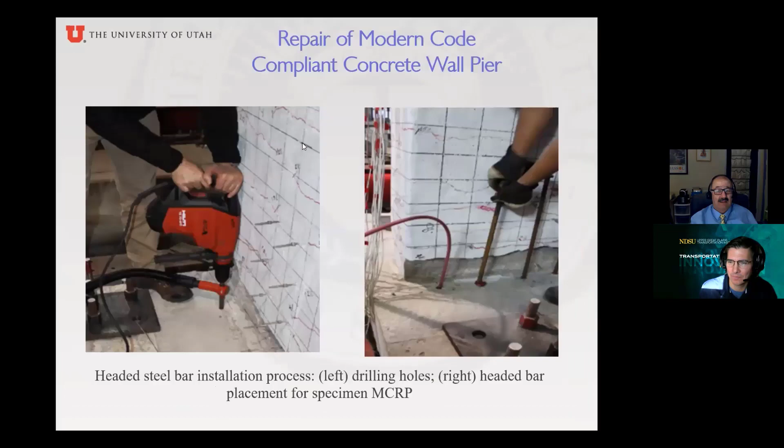So nobody wants to ask me a question. No. Am I too perfect? I think we'll just go with that. Yes, I am. Well, I think we answered a lot of questions early on, before we started. So sure.

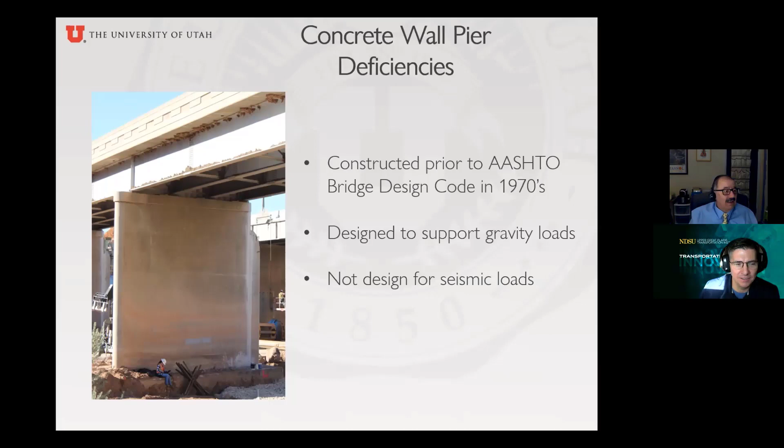So Chris, the question that's out there is, can these designs be used in non-seismic areas? Oh, absolutely. Yeah, absolutely. These designs can be used because even if you're in a non-seismic area, sometimes you need to reinforce the pier or the column for capacity because of increased truck loading. For example, in Utah, we still have a couple of bridges on Foothill in Salt Lake City, near the university, which the engineers at UDOT asked us to wrap with carbon fiber, the columns, just because the trucks have gotten heavier. And they are worried that these columns are not going to be able to sustain all the new traffic loads that we're seeing.

I was lucky enough to participate in the construction of a new bridge on US 6 in Utah, on the way from Salt Lake City to Moab and then Colorado. And then we measured actually the weight of the trucks, and you will be surprised. I mean, we're designing for 32 kip axle loads, and we saw trucks that weighed more than 124 kips. That's 124,000 pounds. And so there is much more loading now than when those bridges were designed. So yes, these materials can be used to strengthen existing bridges in non-seismic areas.